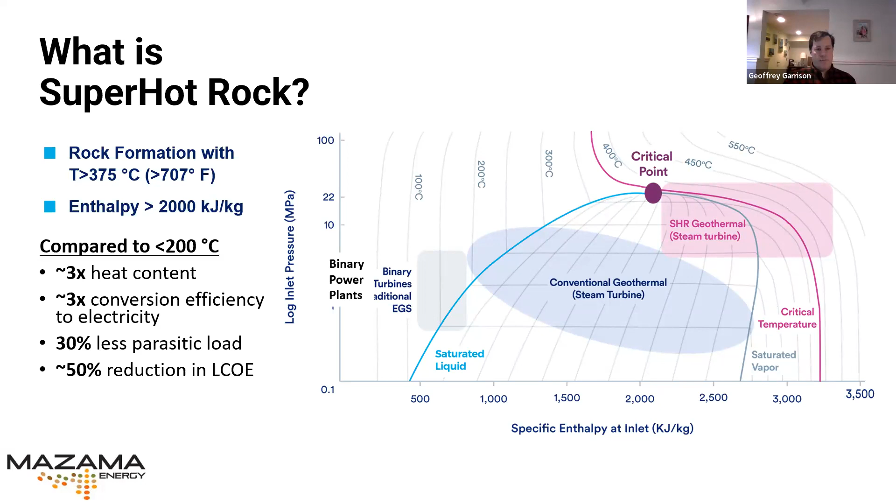We believe that if we can get wellheads that are producing fluids in this range, we can produce a fluid that's much more economically viable. We can produce a lot more money for our generators. The question is, why do we want to do this? The value proposition is that we produce more energy with less infrastructure.

So not only do these fluids carry more energy at 400, 450 degrees Celsius, as opposed to 200 degrees Celsius, we need less infrastructure at the surface. You need a smaller energy plant per megawatt. So if we can double the temperatures of fluids being produced at the wellhead, we need less than half the size of a power plant.

And reducing that amount of infrastructure, that amount of steel required at the surface to produce energy, reduces our costs tremendously. It reduces not just CapEx, but also your operating costs. You've got less material you need to operate, less maintenance, less personnel per megawatt. So everything sort of works out.

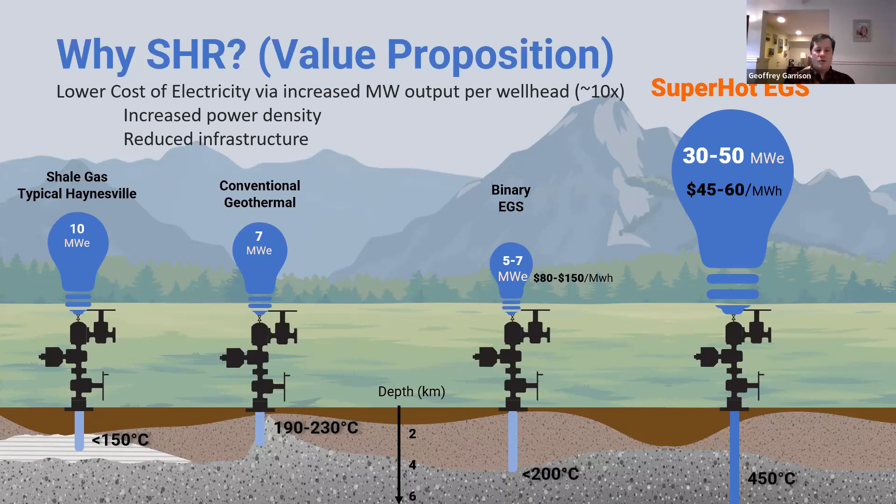When we look at the fields across the world, when you look at the megawatts per well as a function of reservoir temperature, this is a very generalized approach, but it's a broad brush look at geothermal plants across the world and across time. Conventional power plants operate in this range, 200 to 250 degrees C at the high end. This is like the Geysers in Northern California or the Salton Sea or Indonesia or New Zealand.

I'm going to be focused on the United States, but this is the Nevada plants. These are binary plants. These are the ORMAT plants, the plants that are being built in the Nevada area, Reno, Utah. Some of the plants in Germany and France and the speculated plants in Switzerland are also operating in this range. So these are economic, but only in specific cases, and it's tough to make these work in an enhanced geothermal type environment. And I'll talk about that in a little bit, why it's so expensive.

Looking at the white space that we're trying to move into is up here beyond 350 and 400 degrees C, where we can get megawatts per well in the range of anywhere between 20 and 40 to 50 megawatts per well. Our future plans talk about where our initial plants that we're targeting are in this range. This is our pilot plant, our objective that we're looking at now.

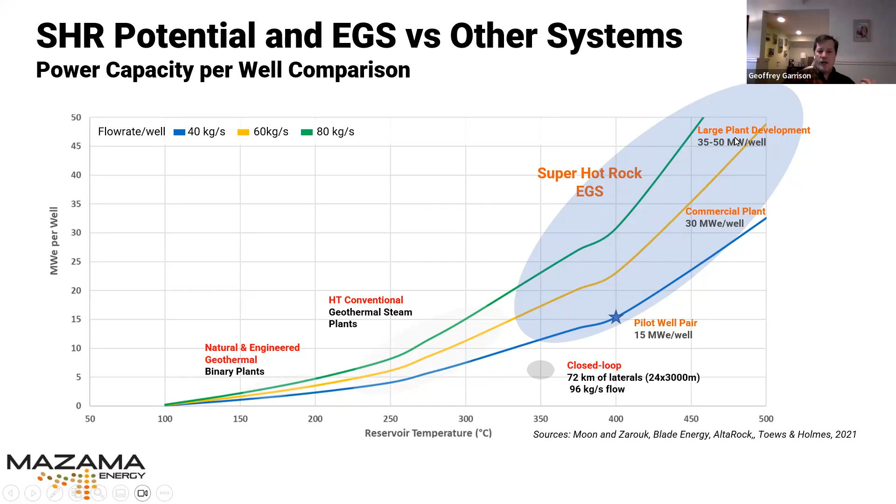And the market for this is tremendous. Where do we reach these temperatures, these 400 to 450 degrees C temperatures? Using current drilling technologies, we can reach these conditions in approximately 50% of the world's energy market, or within drilling ranges using conventional technologies. So in the up to 9 to 10 kilometers depth range.

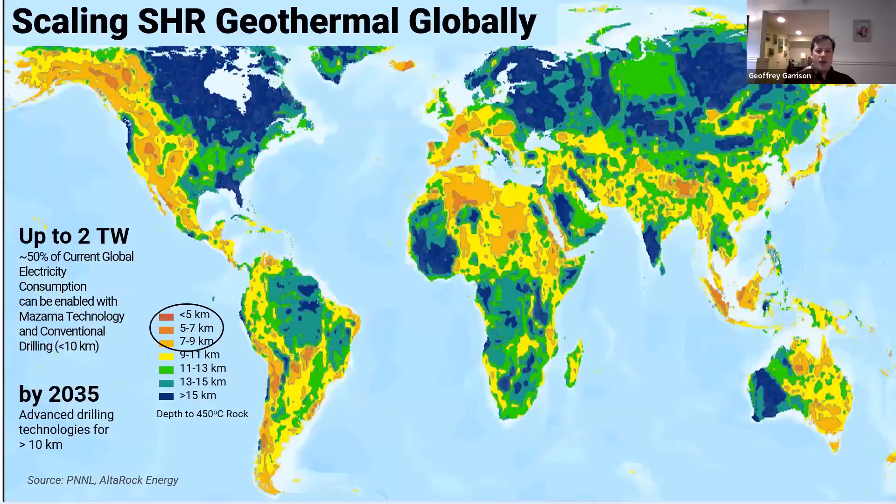There are technologies out there that are being developed, hoping to extend drilling technologies beyond 10 kilometers down to 15 or 20 kilometers. In those situations, we would be able to reach pretty much 90 to 95% of the world's global energy market. But just today, using today's conventional technologies, with a little bit of tweaking and a little maturing and being sensitive to the technologies and how they're handled, we believe we can get down to 10 kilometers and reach 50% of the world's global market.

Now, we're using the term super hot rock. And 10 years ago, 15 years ago, people were talking about supercritical geothermal. In Iceland and in New Zealand, they talk about reaching supercritical reservoirs, so drilling into naturally occurring supercritical conditions. We're not focusing on supercritical conditions per se. We use the term super hot to indicate it's much hotter than what conventional resources are. It's not so pressure dependent, but temperature dependent.

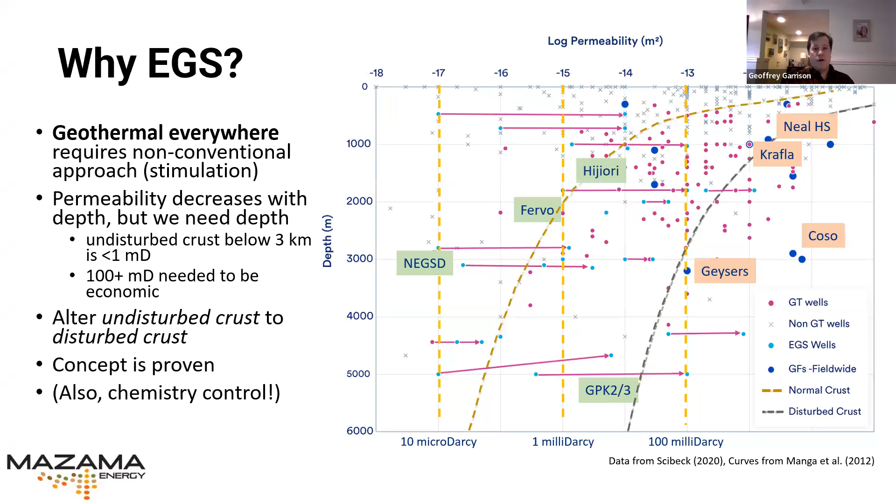This is the Fervo project, which was recently published, in north central Nevada, where they took two wells, took a crustal environment that was considered undisturbed, and using stimulation, EGS in a greenfield, carried it into what is now basically considered an economic project. They're producing hot water economically. We haven't seen the published results yet, but that hot water is going into the plant and producing electricity from what is considered a greenfield type environment.

So there are different types of engineered systems for heat extraction. There's the closed loop system. This is the Eavor type system with multi-fingered, lots of drilling, not much risk in terms of the geologic environment. This type of system is very geologically independent because all the drilling is closed loop. It does require a tremendous amount of drilling length in order to get the surface area needed to be a viable producing resource.

This is the model of what we call hydroshear stimulation. This is a model that AltaRock worked with for many years, and this is what is also considered traditional EGS. This is stimulating existing fractures in the rock, not creating tensile failure, but creating permeability in existing fractures. This we found to be very difficult. To get enough surface area to be economic was very difficult. It's also difficult to predict; there are so many variables in the subsurface. This turned out to be geologically risky in terms of characterizing what kinds of fracture network you can develop and predicting fluid flow.

Let's skip over here to the planar fracture model. This was also a traditional model, carried forth by a lot of oil and gas technologists. The idea that we could create penny fracs to connect two existing wells, going heel to toe and toe to heel. This also turns out to be much more difficult than the models predicted. The variability in fracture permeation through the reservoir is hard to predict, and so connecting two pre-drilled wells turned out to be very difficult.

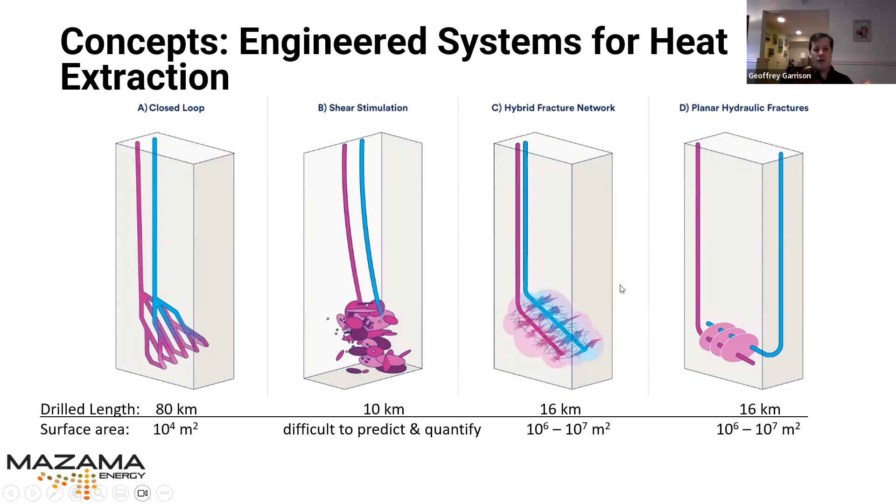Now, there's many different models and many different cases, and different folks will argue different situations. This is the model that we're arguing is best suited for SuperHot Rock reservoir development. So let's skip over to field work. I'm going to talk about the Newberry EGS project.

This is in central western Oregon, between the towns of Bend, Oregon, and La Pine, Oregon. This is a large caldera system. Newberry is a shallow sloped, large volcano. It's basically the biggest volcano that people in North America have not heard of. It's about half the size of Yellowstone. It is a large caldera system, large magmatic body at shallow depths. It's quite accessible to drilling.

People have looked at doing traditional hydrothermal geothermal there for several decades, since the 80s, unsuccessfully. In 2008, 2 wells were drilled there on the west flank searching for a hydrothermal system, which turned out to be unsuccessful, and they discovered this very impermeable rock. And so AltaRock came along in 2010, bought up the leases, and proposed a demonstration project to do what we call traditional hydrothermal stimulation, hydroshearing stimulation.

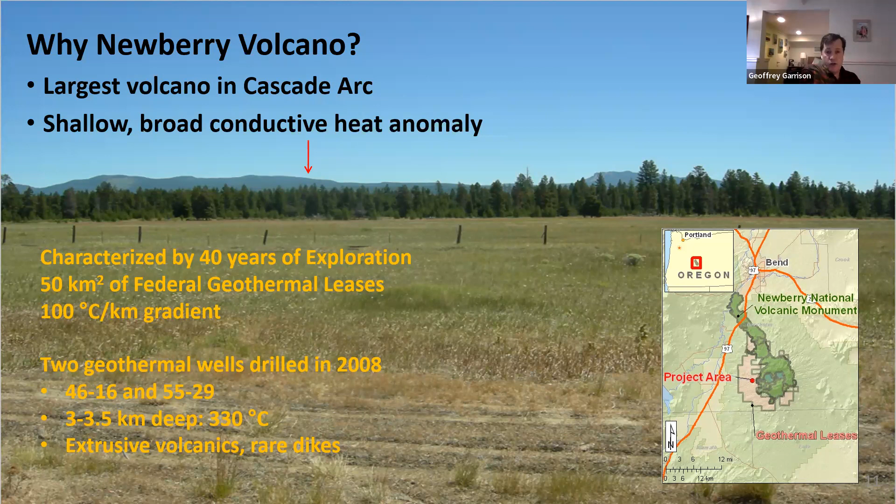That is low pressure stimulation, below SH min, the minimum horizontal stress, trying to activate existing fractures in order to create a reservoir that we can flow water into and create a heat exchanger. This is a timeline of the work that's been done there since 2008. We had 2 stimulation projects. These were projects funded through the Department of Energy, developing really the techniques for doing EGS.

So getting in the field, understanding how to do microseismic system installation, how to do monitoring of fractures as they occur as we do stimulation, following in real time the progress of fracture stimulation across the reservoir. We proposed to be one of the sites for FORGE. We were one of the finalists. Utah was ultimately selected, which was probably the right decision considering the success that they've had at FORGE. I think they've done very well and demonstrated that's a very good site for what they're doing.

We had an International Continental Drilling Project workshop there in 2017. We proposed the site for deeper drilling, going after the deeper resources. We had some success and some traction there. We had a lot of interest. Ultimately, funding was not successfully raised, and we shut the project down in 2018 when it went dormant.

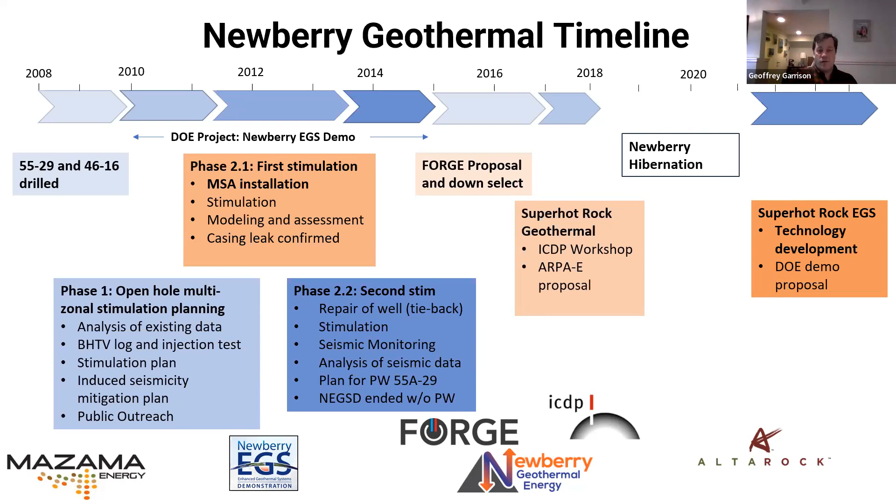And that was until 2020, when interest came back into geothermal from the oil and gas programs, given that the price of oil and gas had gotten so low. Everyone in Houston turned towards the possibility of geothermal drilling and geothermal resource development. We got renewed interest, and so we renewed the project. We've got some funding to carry some ideas forward, and now we're proposing a SuperHot Rock EGS technology development and demonstration project there. The Department of Energy is already 6 months delayed in their announcement of those demonstration projects. We're hoping to hear from them by the end of the year.

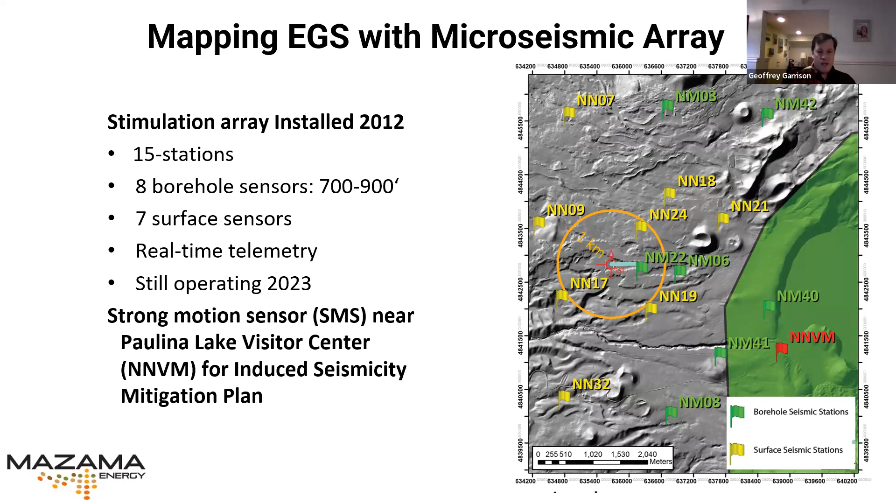In summary of what we did there, this is a map of the microseismic array that we installed in order to monitor the project. It was considered at the time state of the art in terms of microseismic arrays and microseismic monitoring. It was the gold standard up until a few years ago, and now with the advent of digital fiber and distributed fiber acoustic sensing, the technology is really being carried forward. And there's a new understanding of the importance of microseismic analysis.

Our approach going into that project was large volume, low pressure, long duration stimulation. We went to Baker Hughes and had them develop a couple of specialized pumps for us that allowed very high injections at relatively low pressure, so 3,000 PSI over periods of weeks to months. These are centrifugal pumps laid on their side that have long-term duration with low maintenance.

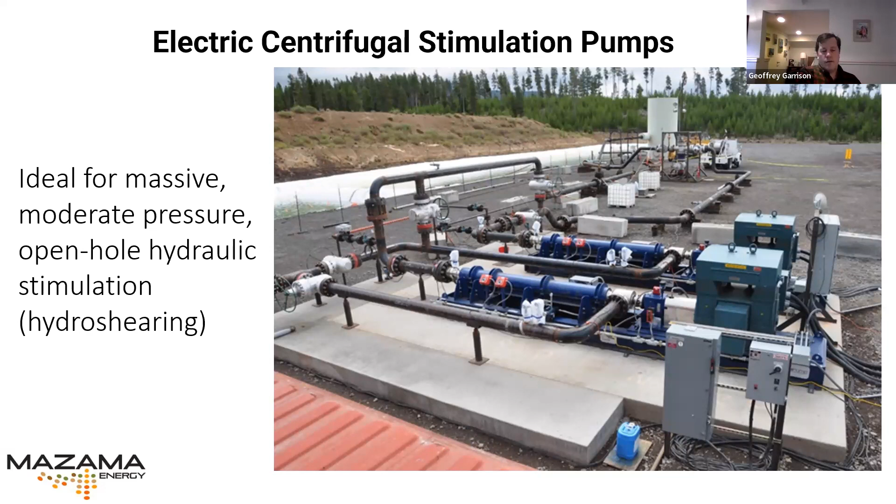Ultimately, we found that it was really not necessary. We found that primarily most of our stimulation and natural occurring fractures occurred within the first week to 2 weeks. So having these long duration pumps, we sort of learned that this wasn't necessary to have this kind of technology, that doing low pressure stimulation over long periods of time is not necessarily the best objective.

But we did have success in creating reservoirs. This is one map or one graph of our seismic events that were mapped during the time. This is in 2014. We had kind of a 2-phase stimulation campaign in that project. We were able to map out, this is a voxel array model showing where our fractures occurred. This was used in plotting our second well.

So the existing well, which is called 5529, was our treatment well. We created a fracture network, we plotted and just designed a well we called 55A29, which was going to be our production well. Ultimately, that well was not funded and not built, but we took it as far as doing a full well design, actually permitted the well.

The ultimate goal, the output of this project was we were able to map the fractures. We were able to create moment tensors that allowed analysis of the deep-seated stress regime. We did not have information from very deep because no one had visualized down there. And being that it's a volcanic environment, the stress regime changes quite radically as you go through depth. We were able to map that out. We were successful in doing our seismic analysis and doing our MEQ location, our micro earthquake location.

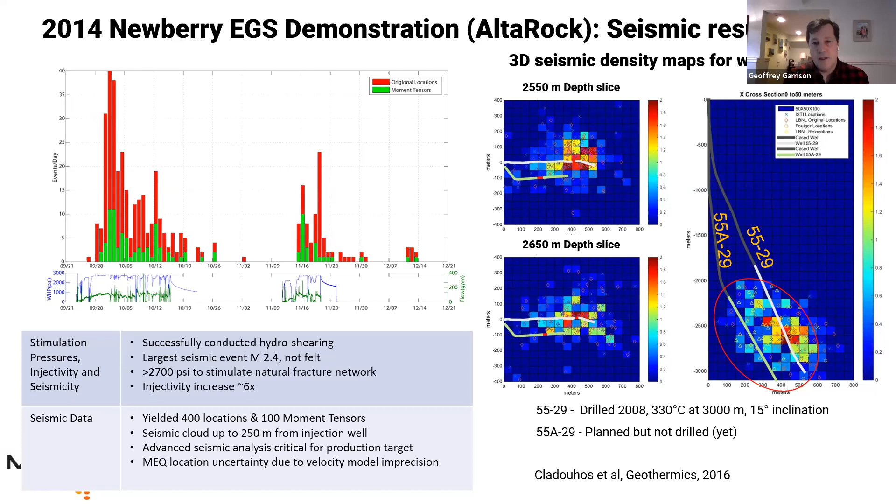And we just didn't develop enough surface area at depth to create enough flow to support any kind of power plant at the surface and get any kind of economically feasible power on the grid. And so that's one of the reasons that the project was put into quiescence. And so from that work, we had lots of remaining questions on how would we carry it forward? What would it take to make the project economic? We needed better connectivity, better productivity.

Without a production well, we didn't have a well to frack into. We found that was quite important. We essentially felt like we were inflating a balloon, and that balloon we can't maintain constant pressure. And while the reservoir would grow, without a second well to connect into, we ultimately didn't get flow through a reservoir. We didn't get the connectivity of the flow and the increase in permeability that comes with creating that flow that we've modeled for enhanced geothermal systems. And so economic generation at 250 degrees C wasn't compelling.

Going into 2017, looking at the idea of doing SuperHot Rock, that's when we sort of pivoted towards higher temperature conditions. We've modeled that. We think we can get the price of power down at our nth plant development in the range of $45 US per megawatt hour, which is almost half of what it is now at 200, if you're doing an EGS project at 250 degrees Celsius. We think we can get the power with smaller power plants at the surface, fewer wells, less infrastructure, fewer casings, less cement. We believe we can reduce the price of power by half.

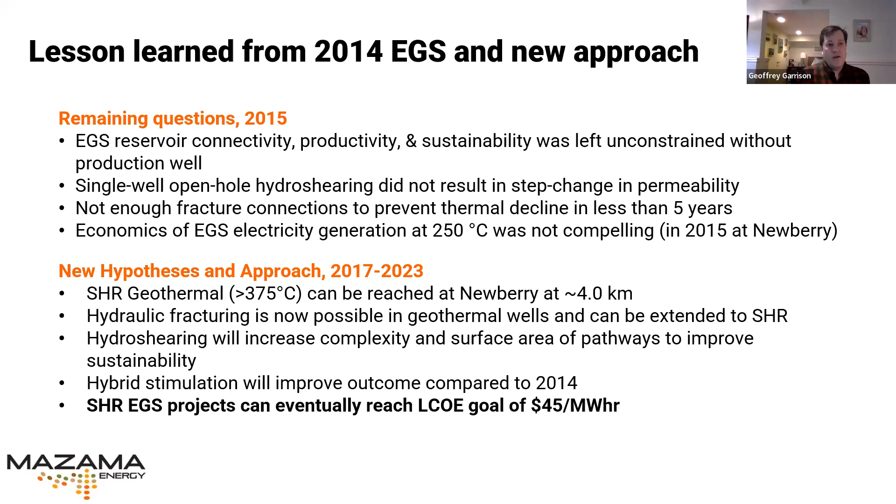That will take several steps through demonstration projects, and it'll take several iterations and generations to get to that point. But we think with what we've modeled based on what we've done, looking at the hybrid approach, the two-phase stimulation approach, doing tensile failure first, followed with hydroshearing, we think we can get the complexity and the amount of flow that we can maximize the reservoir area per well.

So what have we learned? What have we learned about EGS SuperHot Rock work in the past, and how do we carry that forward into our ambitious plans for the future? These are some of the wells that have drilled down into SuperHot Rock conditions in the last 15 to 20 years. Almost all of these projects have hit these conditions.

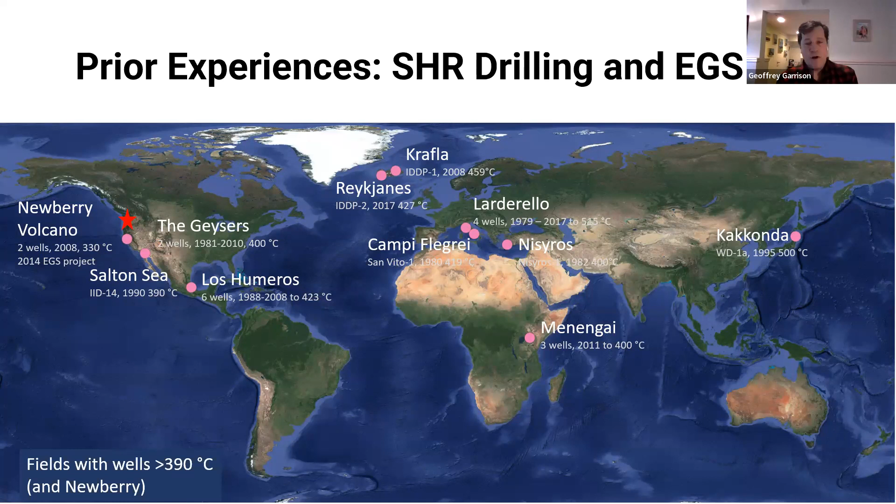Most of them were intentional, not all of them. In most cases, these wells have all been made dormant because there's been difficulty in handling the fluids. So we know we can get to these conditions. We know we can get down above 400 degrees C. The question is, what do we do when we get there?

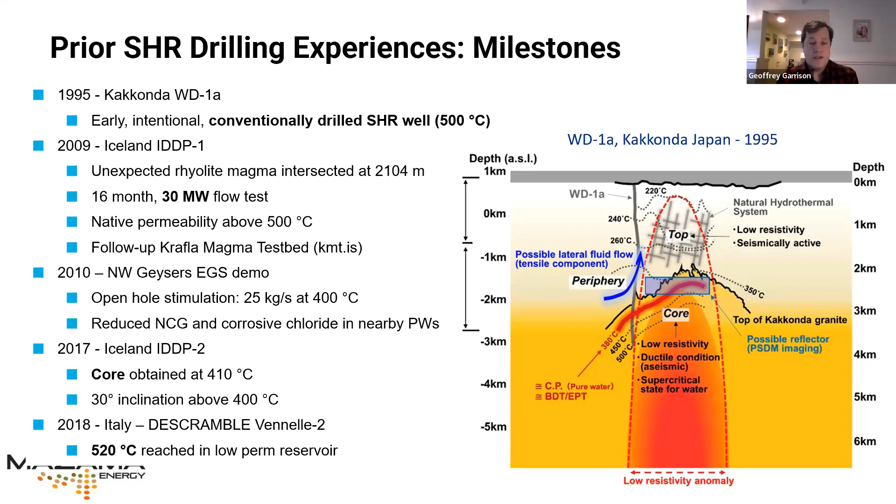In Iceland, the Icelanders have determined how you can turn the corner at high temperatures if you have the right instrumentation, the right cooling. The Descramble well in Italy showed that you can actually get through areas with no returns and still successfully complete a well. But there have been failures, and there's been some stumbling blocks along the way, which of course, anyone who has had a failure, that's where you learn the most, is from your mistakes.

Near surface corrosion, material compatibility is a big one. Naturally occurring supercritical fluids are highly corrosive. They typically carry high loads of sulfuric and hydrochloric acid, and they have a very low pH. They tend to eat through most steels, unless you've got a very resistant steel, or let's say you use titanium. Most of the projects in the past are sort of on shoestring budgets, couldn't afford titanium.

One of the biggest lessons learned in drilling these deep wells is don't stop your drilling. If you pause while drilling, the heat up can be detrimental to your entire program. And what's more, if you do stop and you do slow down and things heat up, you need to really back out and start all over again with your cooling program. Trying to re-enter a hot well too soon can cause total failure.

Cementing, sorry, one of the things I skipped over a little bit, cementing is extremely difficult at these temperatures. There's been a lot of new development in cementing technologies in the last 5 to 10 years, which are very encouraging. We've seen some very good cement work being done, looking at the actual chemistry of cement at these higher temperatures.

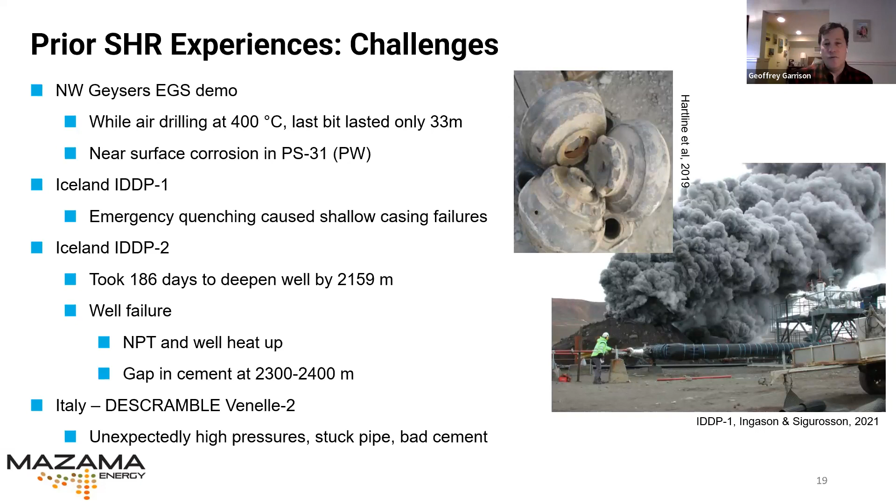The retardation programs are important and need to be really well thought out in order to make sure your cements don't set up too quickly or don't cool off, that they stay liquid long enough, but that they don't stay liquid too long. So what is the state of the art of the technology that we've learned from traditional projects? One of those is that we can get to these temperatures. The well completions are very challenging.

Experience tells us that we need really, really good planning. We need to really think these through very thoroughly before entering the field at all. We can't really do anything on the fly. You need really robust risk assessment and mitigation programs. The wells that have been successfully installed really took their time getting there, walked through all the steps, all the phases, and all the mitigations. Having 2 or 3 mitigation steps for every risk that you can identify before going in the field is pretty much a standard. You have to have that.

EGS in low permeability conditions hasn't been attempted. Tensile failure stimulation, fracking in these kind of conditions hasn't really happened. We don't have any good examples in the field of anyone fracking rocks at these kind of almost ductile conditions. So we're approaching the ductile transition in the rock regime. We don't really know. We have models of how these rocks will behave, but we don't really have good field data to back that up.

We don't know how these fractures are going to permeate through the reservoir. We have very little idea what the fracture toughness is going to be when we do fracking. So having field data is actually key, and that's one of the big goals for Mazama, is to go out and get some field data and understand how our models are performing in relationship to the real world. And so the gaps going forward are basic science. What are the conditions? Well, we know what the conditions are going to be.

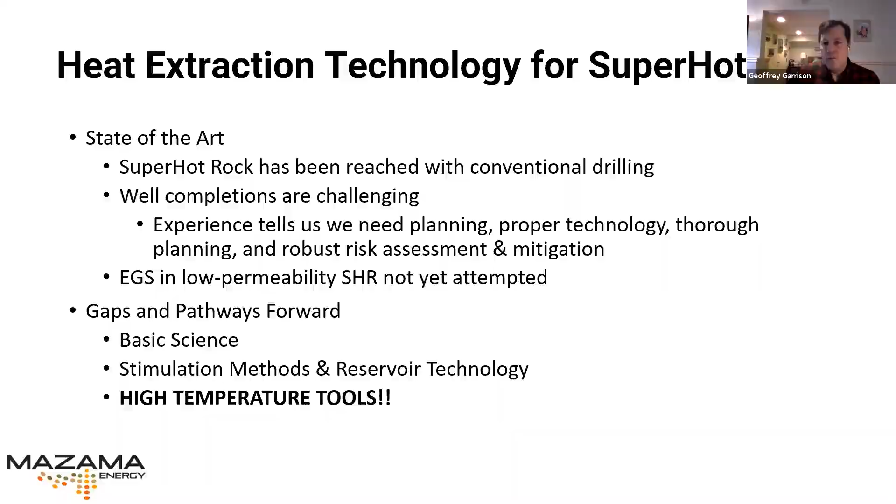And so we've identified the technology gaps. We've made a couple of publications out there identifying different materials and where we need research and where we need improvement in the SuperHot Rock regime. Drilling and well completions is one. So directional drilling, zonal isolation tools. We need better reservoir creation and management. We need high temperature materials.

We don't have any proppants that work at these conditions. So if we're going to be doing tensile failure stimulation, we need something to hold these fractures up. We need diverters to control fluid flows at these conditions. We need tracers at these conditions. Most tracers break down at about 200 to 300 degrees Celsius. We don't have any power plant designs at these conditions.

So power plant designs really either top out at about 250 degrees C for traditional hydrothermal projects, or they're optimized for 800 to 1100 degrees C. So that's coal plants, nuclear plants, natural gas plants. So we're sort of in a shoulder regime here in the SuperHot Rock realm. We're going to be producing waters between 350 to 450 degrees C. We need power plants that will optimize for that. We don't have those yet. We have some ideas, but we don't have anything on the ground.

So we need better modeling; we need to verify the models that we have. We need to improve the models we have based on field data. We need better resource characterization tools. So better seismic monitoring tools. There's a lot of work that's been done in the last 5 years looking at nodal arrays at the surface, DAS, electromagnetic induced tomography. There's an interesting technique looking at naturally occurring fluctuations in the electromagnetic field induced by fluid flow.

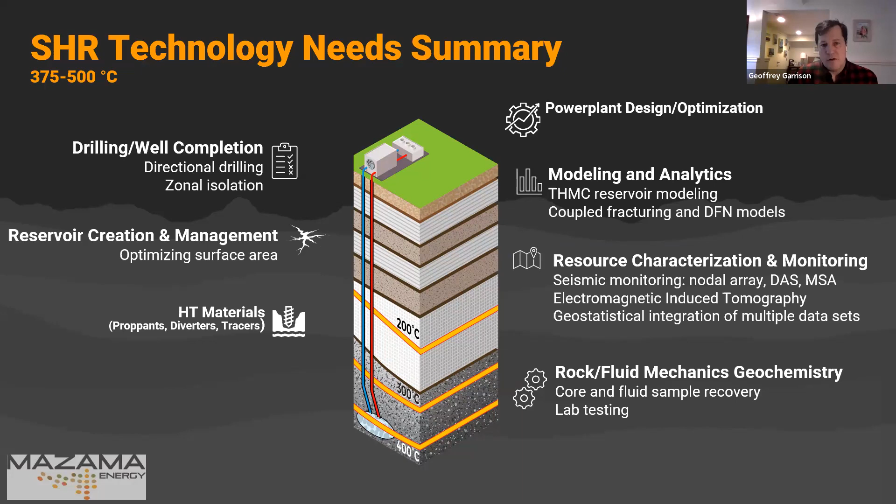We don't know how those fluids are going to react with the rock in the near term, in a period of hours to weeks, and we don't know how those fluids are going to behave when they encounter different metals, different casing materials, different surface materials. So a lot of work has got to go into fluid and materials interaction. So we have a couple of papers looking at these data gaps. These are getting a little dated. They're a couple of years old. We've done some more work looking at data gaps and how technologies can be advanced.

And so the Mazama program has identified several different technologies that we're going to be carrying forward that we think are important. One of which is directional drilling. Oil and gas has figured out how to directionally drill, but their tools don't work at these conditions. They just flat out don't work. We've made some progress trying to marry high temperature electronics organizations with directional tool providers. We're making some progress on looking at where the shortcomings are.

A lot of it's in the electronics and getting measurement while drilling and logging while drilling tools to operate at these conditions. So we've made some very preliminary progress on how to update these tools and make them affordable. Right now, if you want to directionally drill, we can do it, but it's expensive.

You've got to use things like bent subs. It's a lot of trip time. It's a lot of pre-planning in order not to have breakdowns and cooling and unwanted downtime. We want to get up to the point where we have the directional drilling efficiencies that the current oil and gas providers provide and that they enjoy. If we can do that, we can greatly enhance the economics of these programs.

Being able to directionally drill is going to be important in order to encounter the naturally occurring stress regime and get our fractures. We want to get the well oriented right so we can get our fractures right, and we can maximize our fracture implementation. The fracture direction will increase the economics of the reservoir.

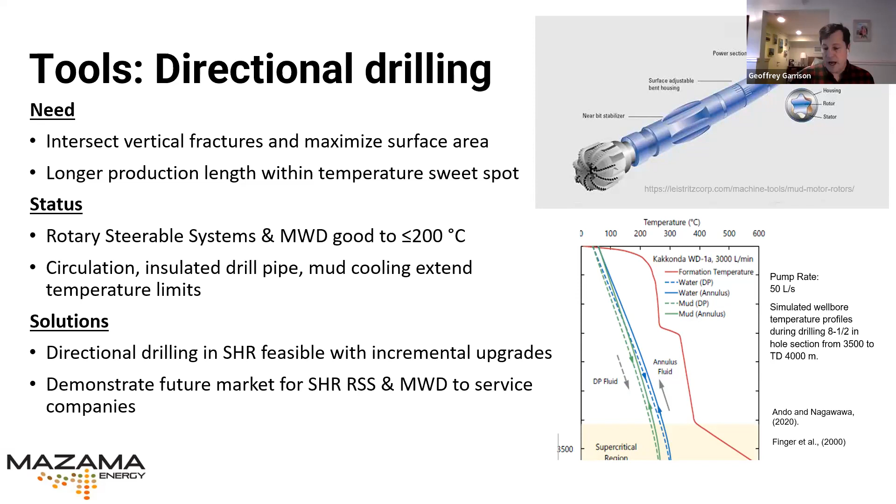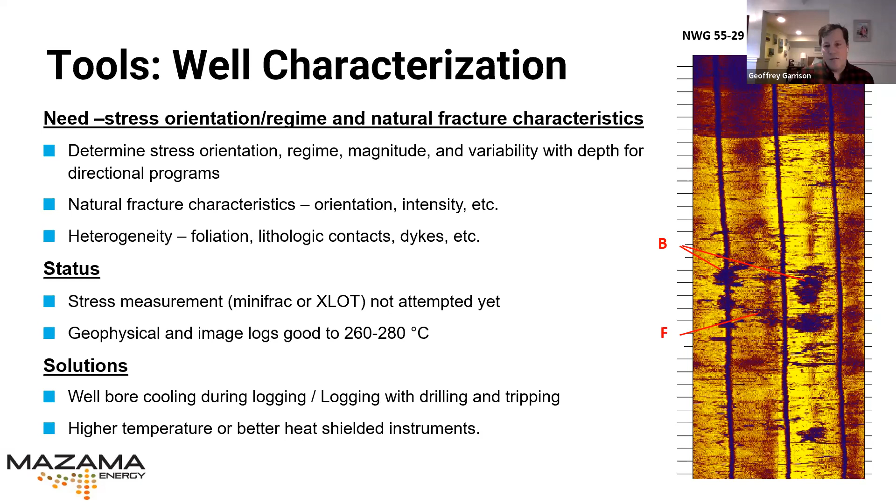It maxes out at 280 C, so we can cool down to the conditions that'll get us there. But this is a one-off tool. We'd like to have more of these and have them be a little more robust. If this tool overheats and it fries, then we've cooked it, and we can't use it anymore. We can't plan our new wells, and getting your well in the right direction is absolutely vital to making a successful program.

We need some better well completions. The stresses that are induced by the thermal cycling in these high temperature wells are pretty daunting. The loads are in hundreds of thousands of pounds. The ISOR group out of Iceland has developed, as an example of a tool that can help move things along, a flexible coupling that provides for expansion of the casing at high temperatures.

These haven't been proved very well in the field. I think they've got one in the field so far. The price point has made them really sort of unattractive for putting more of these in the ground, but they're designed to expand. They do leak, so you have to cement around them. They need to be optimized, but these are the kinds of tools that will help our well casing design and help make our wells more flexible.

It's not optimum to cement everything in. While it locks in your stresses and reduces your failure, it also locks in your flexibility. So your ability to use wells for different types of scenarios, whether it's injection or production, controlling your flow, using things like sliding sleeves, you lose that when you cement everything in place.

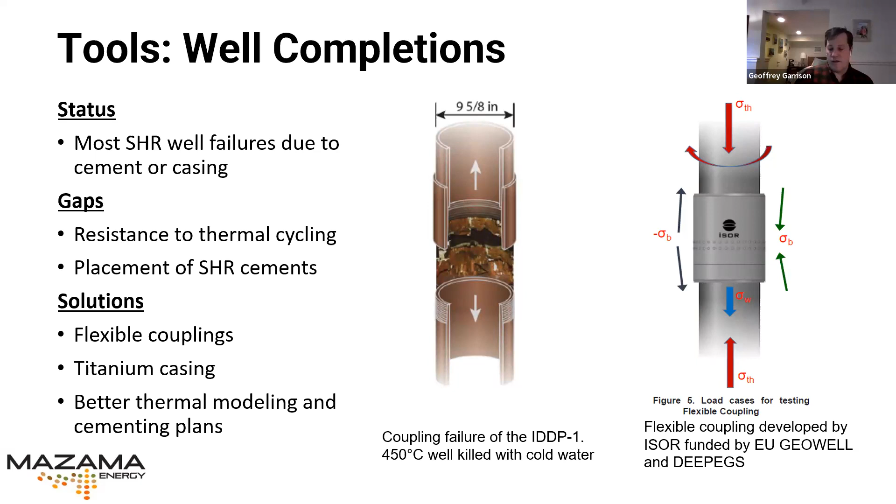Titanium casings are great, but they're tremendously expensive. We're trying to work our way around that. If we can design so we don't have to use the super expensive materials, that gives us more flexibility and the ability to put more wells in the ground. Of course, the more expensive a well is, the fewer wells you can put in. The fewer wells you put in, the less learning you take from the field.

This is some work done out of Switzerland at the EPFL lab, Marie Violay's work. They do a lot of really good work in Marie Violay's lab. I'm giving her a plug because we've supported some of that work and we've learned a tremendous amount about how rocks fail across the brittle-ductile transition zone.

We've looked at two rock types just preliminarily: basalts and granites. So microcrystalline mafic rocks versus macrocrystalline felsic rocks. Their behavior is quite different. We want to look at a lot of other different rock types and see how they fail at the different pressures and temperatures in the superhot rock regime. There are a lot of other different rock types we can look at.

One shortcoming right now in the current worldwide availability of laboratory facilities is that there isn't a lab out there that can handle a rock sample that's more than about 2 inches in length and 1 inch in diameter. So we're limited in rock scale, and that really limits the scale of phenomena we can look at.

So while we can look at the induction, these are all induced fractures created by failure by thermal shock. These rock samples aren't big enough to have any naturally occurring features in them, like fractures or striation or foliation within the rock samples. So we would really love to see someone develop a lab that can handle the macro scale samples, the large scale samples.

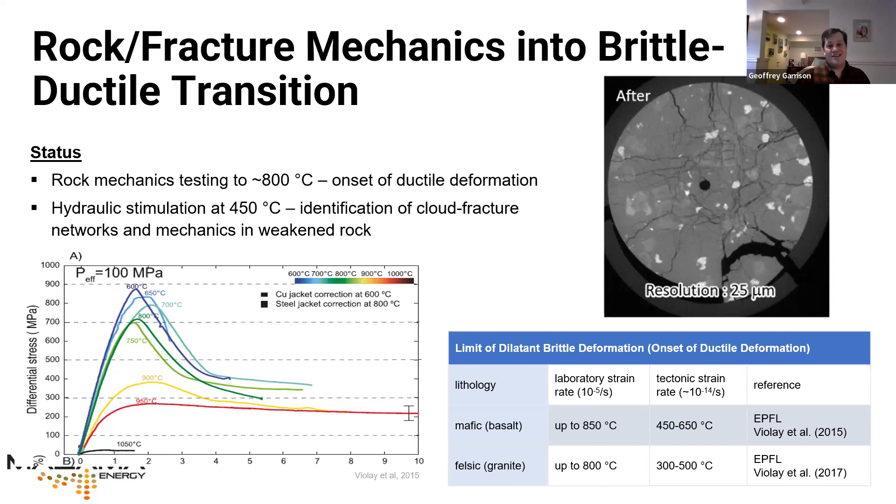It's expensive. These labs can be dangerous because they have a lot of contained energy. Compressing a rock to 200 megapascals at 450 degrees C, it's essentially a bomb. So a lot of labs are very reticent to build these facilities. We've learned a lot from the smaller scale facilities. We're hoping that we can scale up and build larger labs to teach us a lot, because that does save us a lot of work and time and energy going underground.

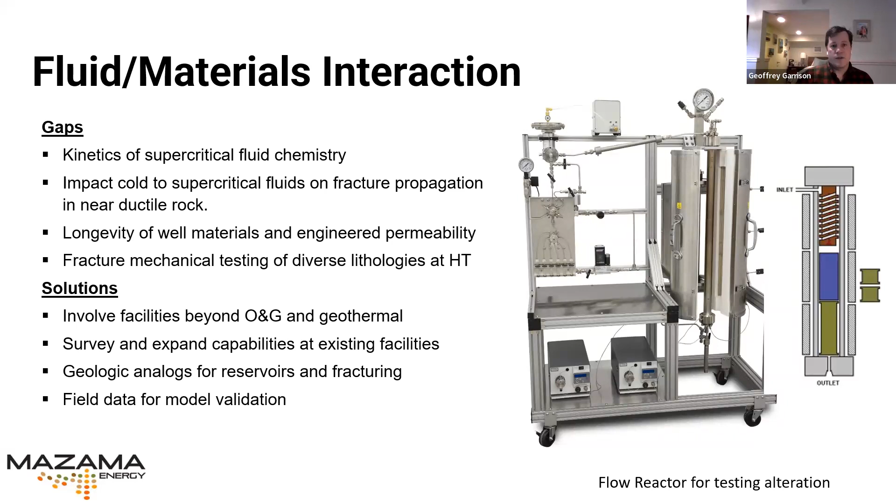So this is looking at how waters evolve in a supercritical reservoir in contact with different materials. This reactor, for example, can get to 5,000 psi and over 500 degrees Celsius. So just packing this up and running different solutions through it in the short term can tell us a tremendous amount of information about, and de-risk a lot about, what we're going to be doing in the subsurface. So we're going to be doing more of this here in the United States, and it'll teach us a lot about what we can do and what we can't do going forward.

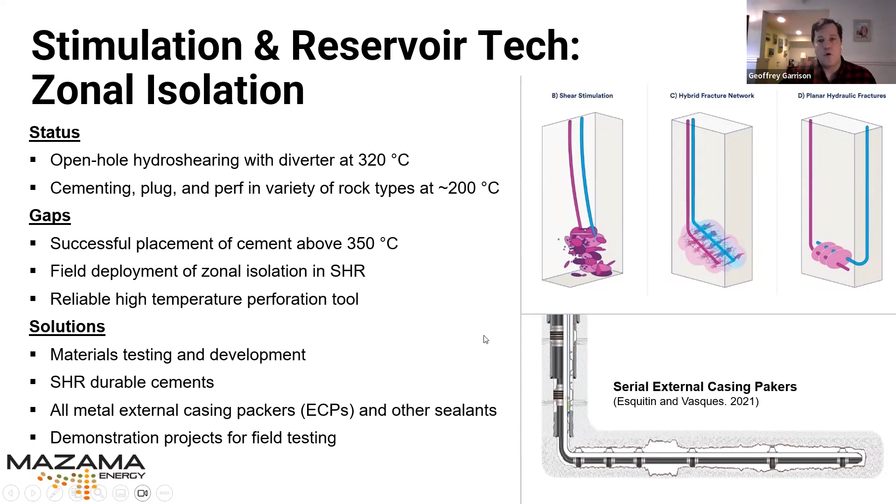And we're looking at different technologies for reservoir stimulations, looking at different materials that can help us in the subsurface, different types of cement, different types of sealants, external casing packers. I know that the Welltec group out of Denmark has developed some really interesting external casing packers that I think are rated up to 350 to 400 degrees C now. These are great new tools with a lot of promise for being able to achieve the kind of stimulation goals that we're after.

And then I want to talk about materials a little bit more. Proppants. Proppants are really one of the Achilles heels for this kind of approach to doing geothermal reservoir development. And that is, how do we keep our fractures open? Traditional proppants all dissolve, or at least quartz sands will dissolve at 300 degrees C. The kinetics are such that quartz just doesn't want to hang around. Ceramics don't want to hang around, they dissolve. Bauxite doesn't want to hang around, it dissolves.

Materials that will hold up tend to be too dense, they tend to be too brittle, and so they don't hold up as a good proppant from a physical perspective. So we've got chemical incompatibilities, we've got physical incompatibilities with existing proppants. We really need to spend some time looking at different materials out there. The material science research on this stuff is tremendous.

There are hundreds of thousands of different types of materials we can look at, and we need to marry the material science group, people who are outside of the oil and gas regime doing stuff in different technology, different fields, and bring them into oil and gas, bring them into geothermal, and talk to them about what they've learned, what they have. There's a lot of materials sitting on the shelves that were designed for other uses that we don't even know about, that are sitting there unused, unthought about.

And I can't tell you the number of times I've talked to folks who are retired, who are emeritus status, who worked on these things 20 years ago, and we're working on trying to recover their notes and bring a lot of these materials back into use, back into understanding. I don't want to reinvent the wheel if someone's already developed materials that are out there.

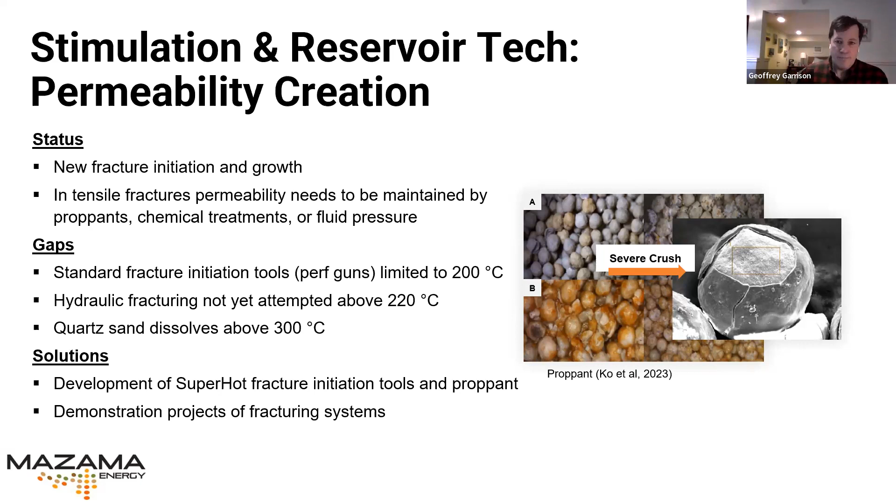So paths forward, demonstration projects are key. We've done, I wouldn't say a lot of lab work, we haven't done a lot of modeling, but we've done enough at this point that getting into the field and de-risking technologies in the field is key. We're at that point now.

The U.S. Department of Energy is going to be funding at least 4 demonstration projects this year or early next year, 4 different EGS demonstration projects. One of those is a super high temperature project. We put our proposal in. We hope we're going to be a leading candidate. We hope that'll be us. If not, we will probably apply again.

It is a rolling process, and so the Department of Energy is now really pursuing demonstration projects. They have an office of demonstration projects now. They really see the benefit of doing demonstration projects in the field. It's time to get out of the lab and make this stuff happen.

In conclusion, one of the things I have to stress is when our company goes forward to the oil and gas engineers, they all sort of balk at the temperatures we're looking at, but these temperatures aren't that hot. If you've got a pizza oven, this is the kind of temperatures you're looking at. I've got a pizza oven in my backyard, and it gets up to 750 degrees Fahrenheit. It gets up to 400 degrees C. We can handle these conditions.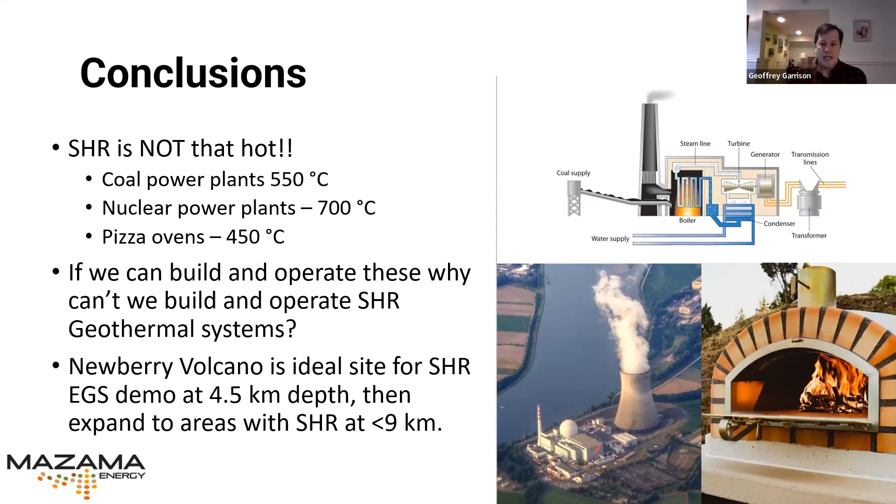Certainly at the surface, the nuclear industry, the oil industry, the gas industry, the coal industry have all demonstrated how to handle these fluids. It's just getting them to the surface. And the Newberry volcano, we think, is an optimum location to do it. We think those conditions are shallow enough that we can drill into it. We don't have to rely on new drilling technologies to get down to those conditions. We think it's going to be a premium location. That is the last of my slides, and I will take any questions.

Thank you very much, Jeff. Really appreciate it. A very interesting presentation. I thought the end was pretty funny, the pizza oven moment. I guess the oil and gas professionals should not fear temperature that much.

So we got a bunch of questions in the chat. The first one has already been answered by you, so we'll move on to the second one from Jovan: from your point of view, which are the main areas where we still need technology and material improvement to achieve those depths on well and system construction, looking at the subsurface?

Material improvement, I would say it's a tricky question. My personal bias is towards compatibility, so material compatibility with supercritical fluids at depth and as temperatures come up. So that's important. I would say cementing technologies, that's a material science that is being improved, but needs more improvement. There are several new cements that have come out in the last couple of years that need to be proven.

And I would say experience working with these materials is important. There's a lot of lab work that has gone into developing new materials for high temperatures. There isn't a lot of experience working with these conditions. So I would say that's really important.